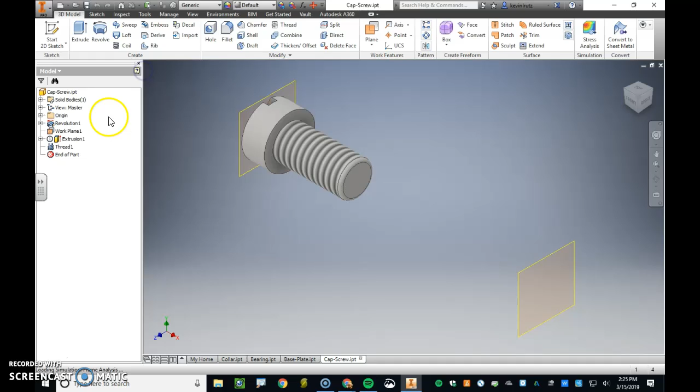The first step is that we need to get stuff in to assemble. Go to the place which looks like a load button, because you're actually just loading up the parts that you've already created. I've got my folder with all of my things in it. Note, if you were to move where the parts are, your assembly won't work and you'll have to find that file again. Make sure you don't move the part files after you create the assembly, because all it's doing is saving the address of the part, so it doesn't have to recreate the part in the viewfinder. It saves on memory. So we are going to drop the base plate.

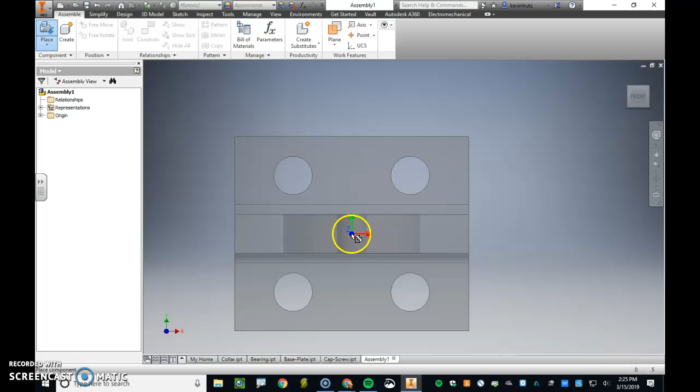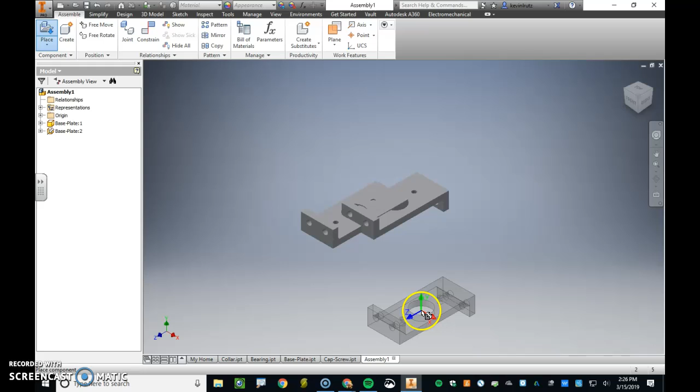All right, we drop it. It's looking good. So the first thing we want to do is we want to lock this into place. It's called grounding. You right-click the object and you say place grounded at origin. I pick the base plate, just right-click, place grounded at origin, and now I did it correctly.

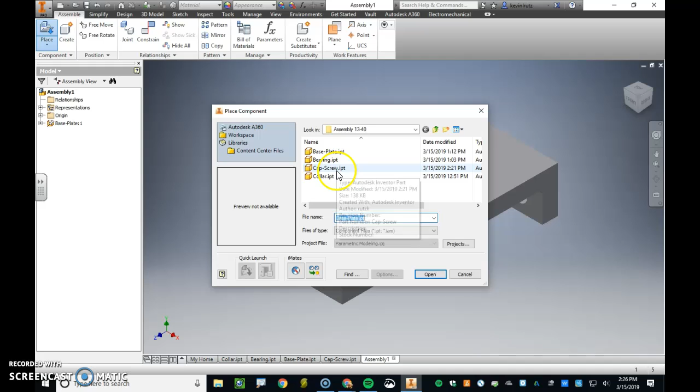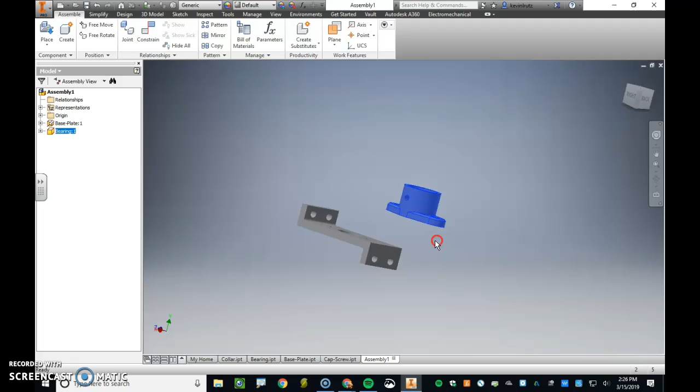Next thing we're going to do is place the bearing. I'm Mr. Popular with all these notifications. So now I place it into the graphics window, and I got these objects floating around. This one I can just move around, click and drag. This one is grounded, so it's not going anywhere. The importance of grounding your first object is to prevent your entire assembly from floating around the entire world, because you can move it in weird ways where it'll look like one thing, but then it actually is a different movement. You want something to stay where you thought it was.

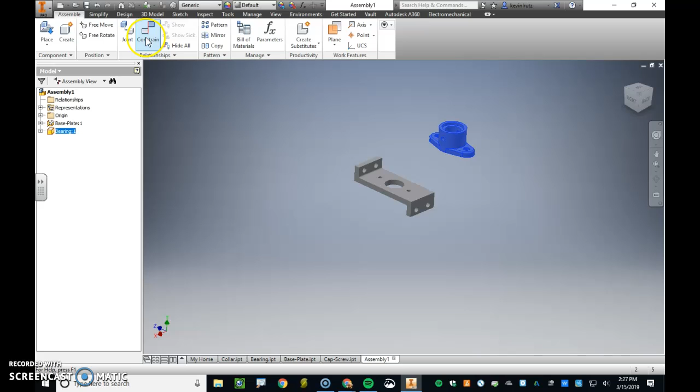Now there's 6 types of movements that can happen. You can be moving in the X direction, the Y direction, or Z direction, or you can rotate in the X direction, rotate in the Y direction, and then rotate in the Z direction. There's actually some helpful things up here, Joint and Constrain. These are going to lock things in place the way you want them.

So let's see what they want us to do first. I'll introduce some of these things. You have mate, angle, tangent, insert, and symmetry. Mate is going to lock things, almost like gluing stuff together in a specific way. Angle will lock them to a certain angle. Tangent will take round objects and place it tangent to a flat surface. Insert would be if you have cylindrical stuff, like screws or objects that you want inserted into another, where there's only one way to fit in. And symmetry, I've never used that one, but I'm assuming you would place things based on a measurement for the object. But let's just continue with what we have in our tutorial here.

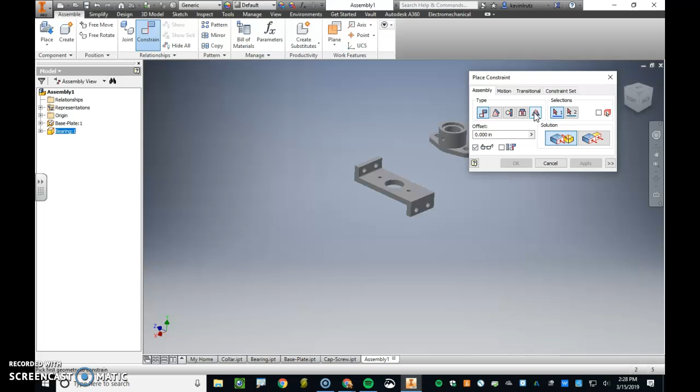First thing is we are going to play with mate. I want the bottom of this bearing to touch the top of this base plate. This is where you got to get really good with your movement commands. Let me introduce this: mate is like animals mating, they like each other very much and they kiss. So the 2 surfaces that you tell to mate will sit on top of each other, like 2 animals kissing. Flush is going to be a smooth surface, almost like if I want my hands to be flush to each other, I put them right next to each other so it's one smooth top surface. It's like gluing the sides.

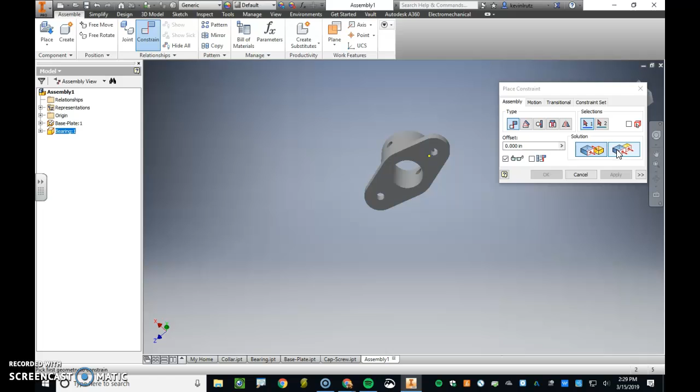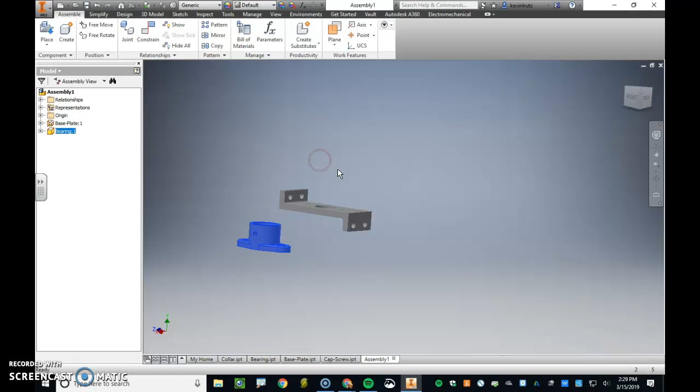So I'm going to use mate right now. I rotate this around, I made it. Makes a little Pinocchio sound. And now it'll slide on the surface. So we have locked it in one direction. No matter where it is, it looks like I'm raising it above it, but I'm actually not. It's moved on the X plane, but it's locked in the Y plane.

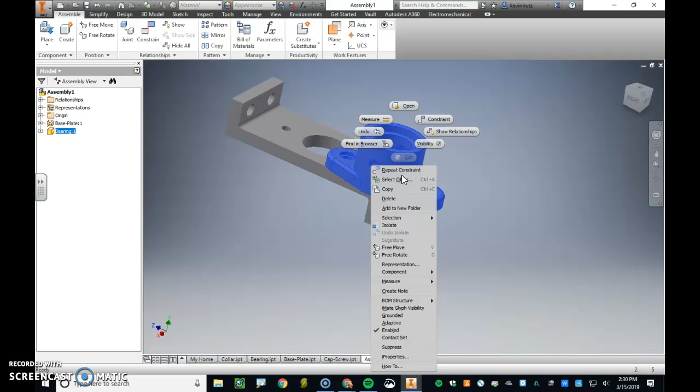Now what we are going to do is lock this using the holes that were bored into the base plate. Something you can also do is find the degrees of freedom, the DOF of an object. For that, you go to the View tab, and here you'll see degrees of freedom. This tells you where things are locked. It's telling me that I can still rotate in the Y direction, but I don't have arrows showing me that I can move it, so it's locked. But everything else is free, I can still move it around in the other dimensions.

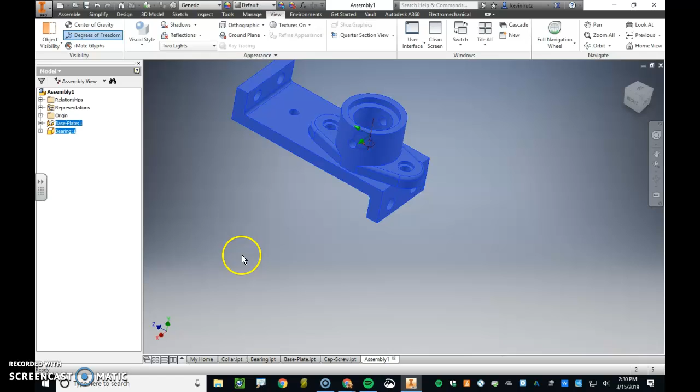Alright, so we've locked it to the surface. Now we want to lock these holes together. We're going to go back to Assemble, we are going to Mate. Now I'm going to pick, I guess you could pick the center of the circle, and I look at the bottom, I'm going to pick the center of this circle too. Beautiful, Pinocchio! I click Apply, and now it's spinning, but it's getting closer.

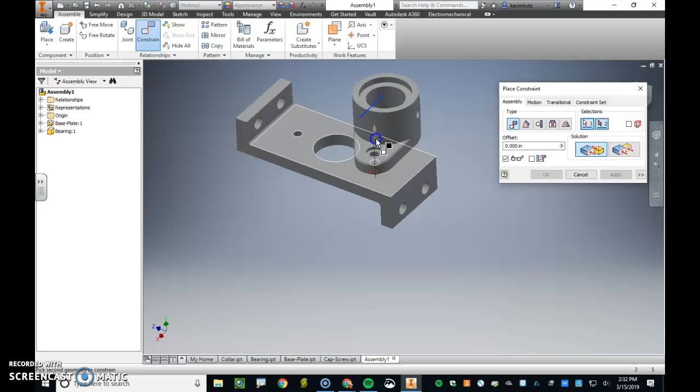Excuse me, let's finish this sucker off. So for the last one, it looks like we are going to...

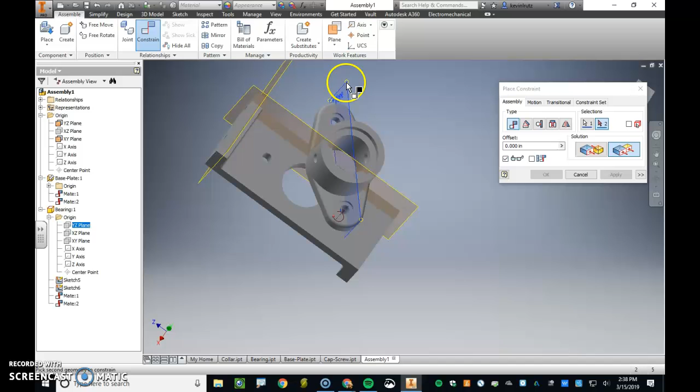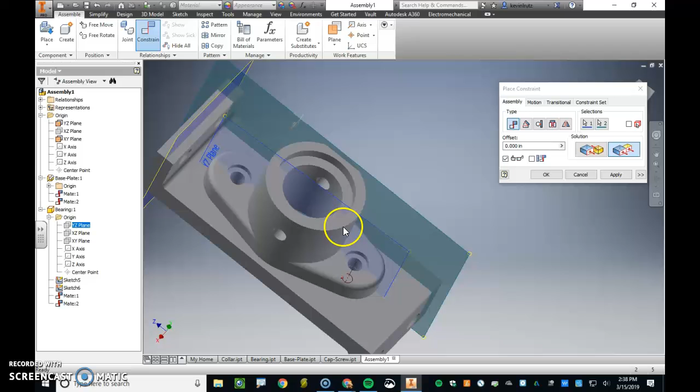So for this part, I am now looking at the YZ plane, and we are going to attempt a flush constraint. It should allow us to click the YZ plane and the YZ plane of the other object, but it's not letting me do that. So follow the book, see if you can figure it out.

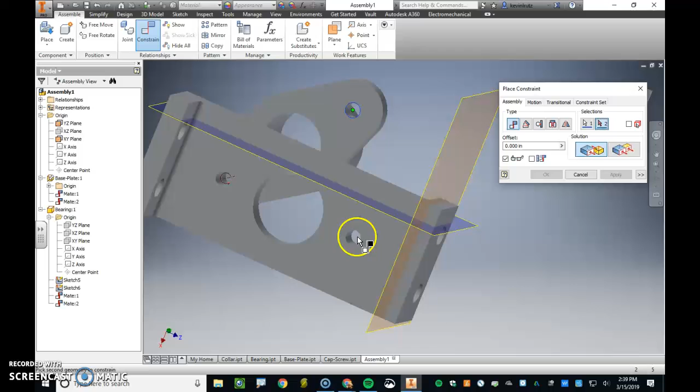What I'm going to do, just because my brain works better this way, is constrain, mate, and pick the center of this circle with the center of the inner circle. Boom, does the same thing. Why overly complicate it? Here, it's locked in, not moving anywhere because it's locked to the grounded piece, which isn't moving. So we're set to go.

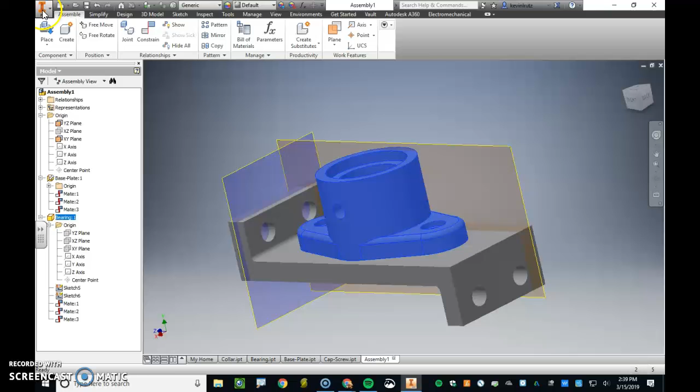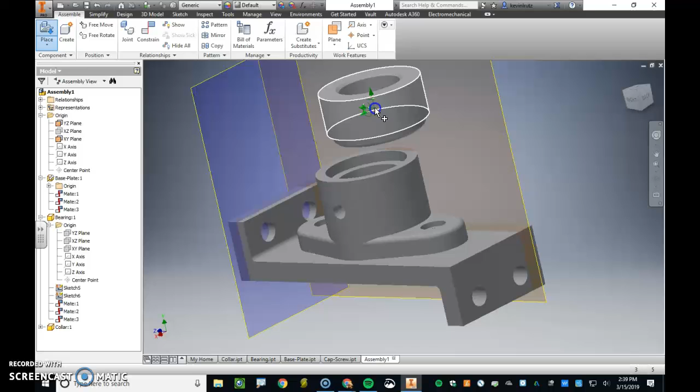Next up, we have the, let's see, place, we're going to place, I want to say the bearing. That's not it. Place, cap, no, collar. We're going to place the collar. Collar is going to go on top of this sucker. So what are we going to do? We're going to constrain it, except this time we're going to insert.

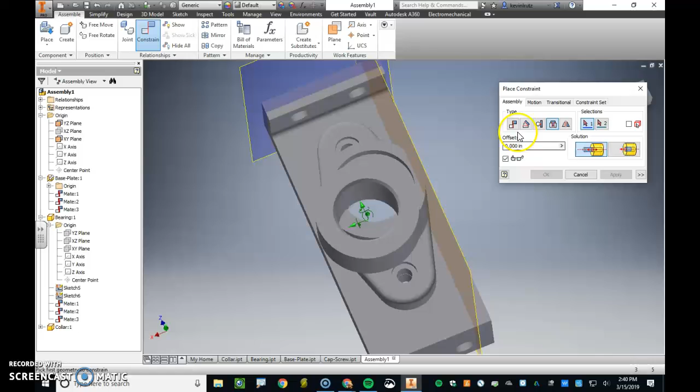So we have to choose aligned or opposed. For this particular one, I believe we are choosing opposed. I've always had problems with picking exactly what I want for the insert command. I undo, I go back, I fix it. So what I'm going to do is choose the outer rim, and choose this rim, and here it's inserted. So here I'm using opposed, but I don't understand how that's opposed.

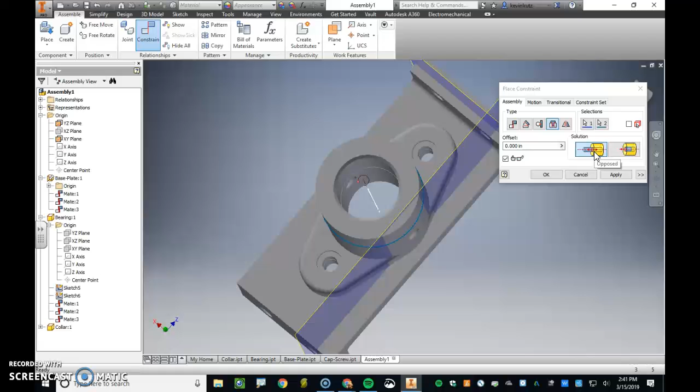That's why my brain doesn't get it. So if I need to, I could say insert, and here, oh okay, that means that it's going into it. Aha, opposed means that they are going into each other. Aligned means that they are moving the same direction. Wow, okay, learned something.

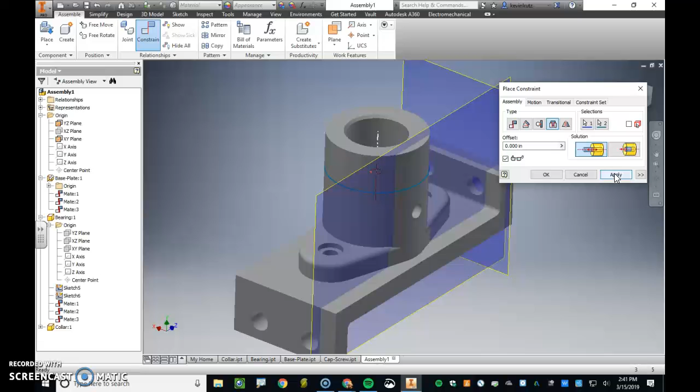So I say apply. Great, we are nearly there. Now we got to screw it up, and we do that with our cap screws. I have all my little warnings, and I'm going to drop 2 of these bad boys here. It's showing me the directions that it's free, because everything else that's locked, this is not.

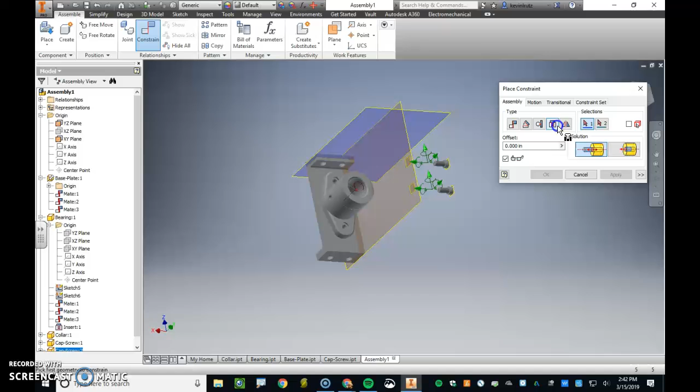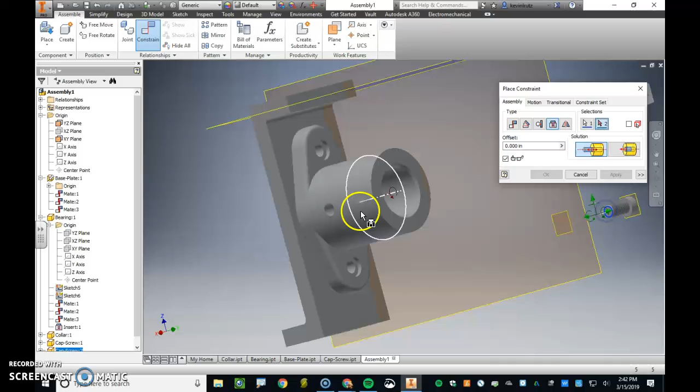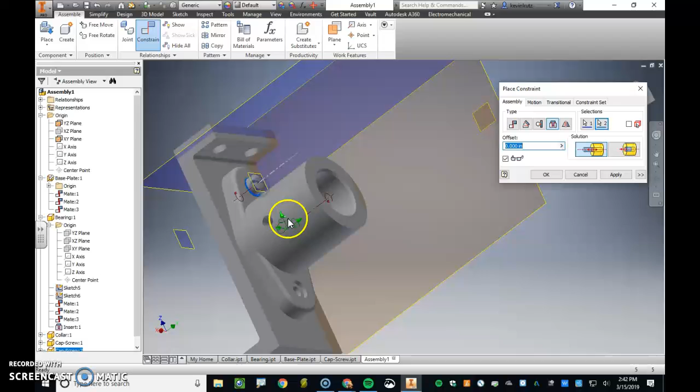And here I go again, getting messed up. Cancel. Okay, constrain, I'm going to insert the bottom of it into the bottom of that. No, now I go to aligned. No, cancel. Third time's a charm, right? So I say insert, opposed. I'm going to pick the inner edge to be opposed to that. That's looking closer. Insert. This inner edge is going to the bottom inner edge. That's baby. Say apply. Cool.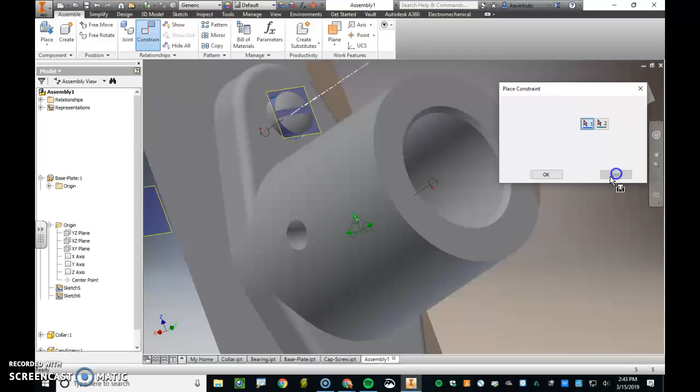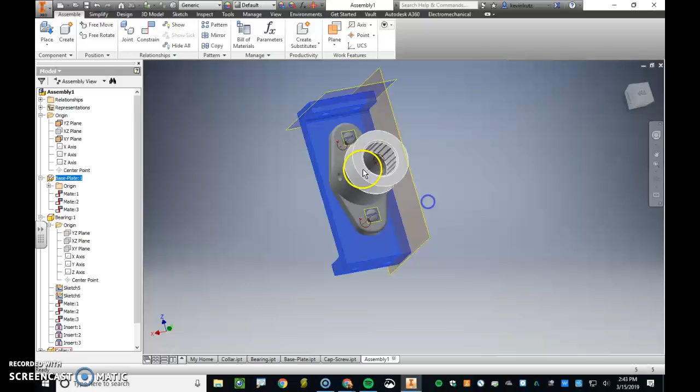Let's do the same thing with the other one, and now it's going to take one shot because I know what I'm doing. Good, apply, done. My screws are rotated 90 degrees compared to theirs, still think it's okay, so I go like this. And now, oh, everything's locked in place, except I guess you can twist them. Be interesting if it had the screw command that you could get to screw in or out.

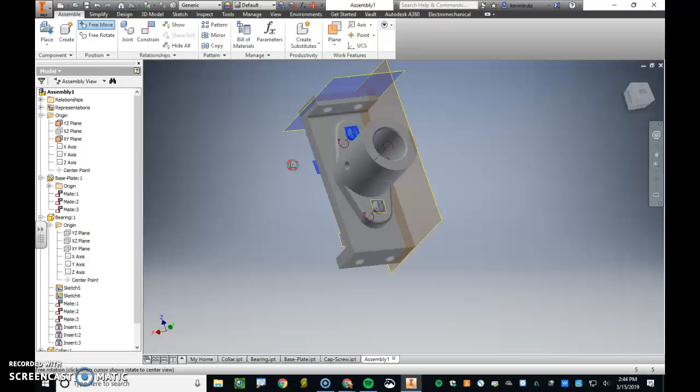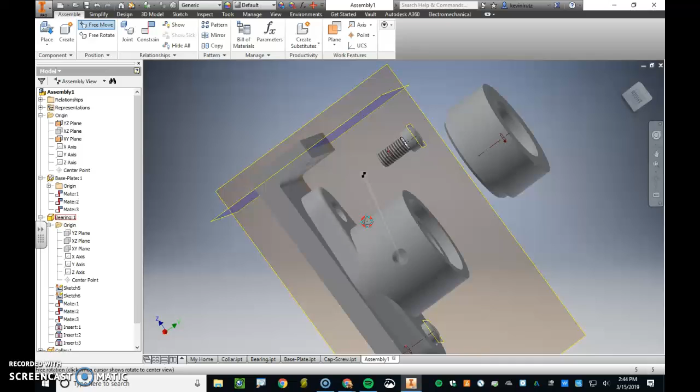Anyway, we are nearly done here. So what you can do is make an exploded assembly, something that has all the parts and it blows up a bit so you can see everything. So you could click free move, and free move will allow you to freely move the part. This is handy if you want to just show where things go. Let's see if I can do that. Yeah, that's further up, and here I'm going to move it up. That's close enough.

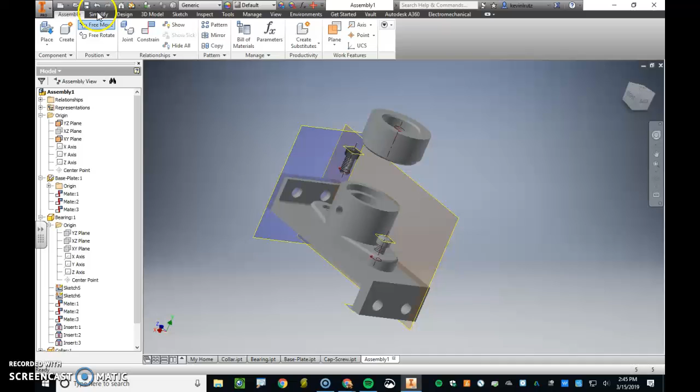Some other things I got to show you too. You can print this picture, you can save a PDF. But then if you want to get it back to normal, you don't have to meticulously get it back in. All you have to do is say local update. Once again, that pops up in the quick access toolbar.

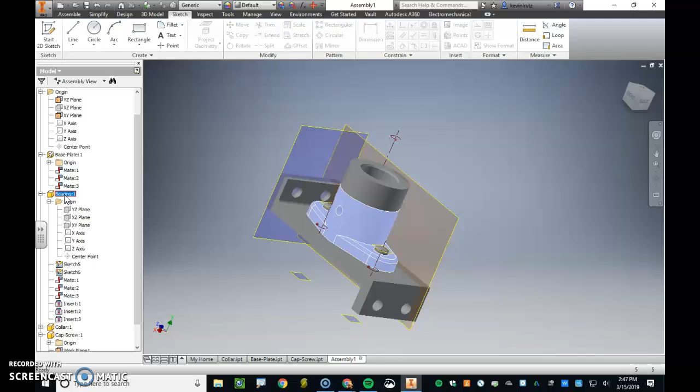There it is. Now, editing the components. What you can do is look at all the different combinations that we used to actually produce this, included in the side here. But something you can do is actually edit like you would in a part file. So, cap screw and... 3D model, no, that's starting new sketches, I don't want to do that. I want to edit. So I'm going to the bearing, right click it, edit, and this is going to be like a mini version of the part creation.

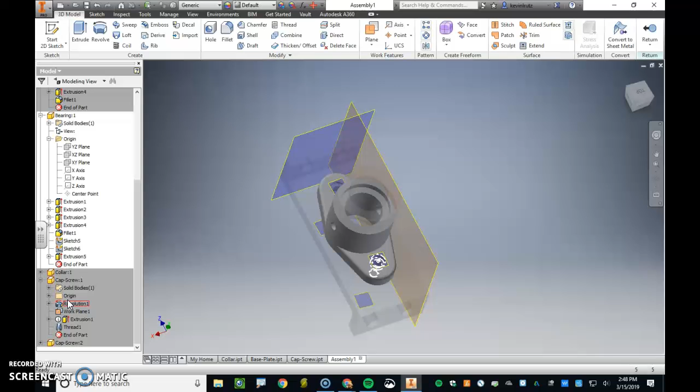So now what I can do is edit my sketch, and you're supposed to make these screw holes smaller. I'm pausing because I want to make sure I get all the details for you. Turns out we're going to need a video 3 because I got about 10 pages to go. So at this point you have now assembled your parts. See you next video.